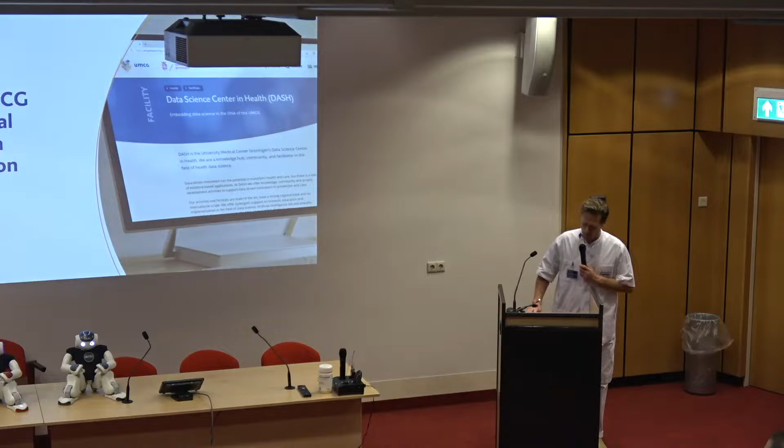What we aim to achieve, it's not so humble, but let's see if we can be a front runner in Holland, maybe even internationally, when it comes to data-driven healthcare. For example, in my case, patient-specific predictions based on machine learning. Why? Because we think that if you have patient-specific, individualized care, treatment improves. And if you want to state it, data-driven innovation contributes to our goal of building a future of health.

So potentially we are on the frontier here in Groningen, and our new decaan, Veronice, will certainly contribute in this direction, I'm sure.

So what can you get out of us, out of the Dash group? These are the pillars: clinical applications of AI, that's the field I'm interested in, to see if we can help patients with data-driven care. Machine learning, that's Peter van Ooijen, not here today, but that's very imaging-based clinical cohort data. Rosemarijn, she's from the radiology department, and e-health is Esther. These are, so to say, the clinical input into the Dash community of all smart computer scientists and the support team.

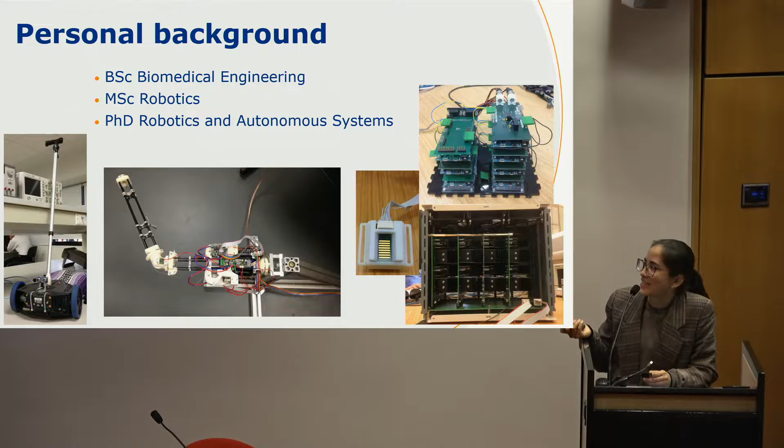So then please help me out for this. What do you guys think a robot is? Can I have somebody from bachelor's just giving a quick description of what a robot is?

What is a robot? All right, yeah. Okay. What about somebody from masters, or PhDs? What is a robot? Yeah, okay. Yeah, right. What about the medical staff? What is a robot? Okay. What about the people that are doing some business or marketing? What is a robot? Non-human actor. Okay, good definition. Not always, but yeah, okay.

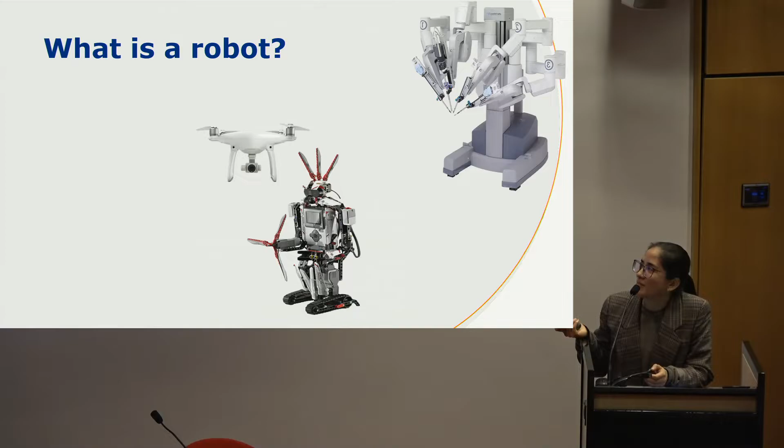Let's go through some examples and then you guys tell me if you think, well, first if you know what this is, and then if you think this is a robot or not. Do you know what this is? Yes. Is it a robot? How about that one? What is it? Yeah. Is it a robot? Semi. Okay, interesting. How about that one? Do you know that one? Does anybody know what it is?

It's a Lego Mindstorm. So you build it with Legos, and then it has here a console that you program. Is it a robot? Or is it a toy? Or is it a robot toy? What about that one? And it's a robot. Okay.

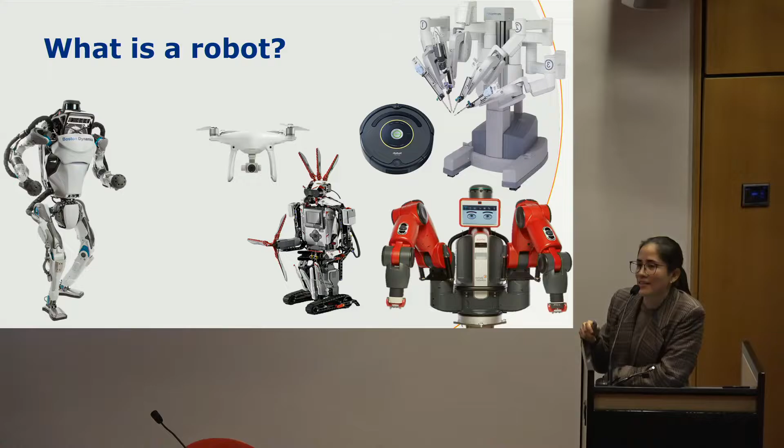How about that one? Have you seen this before? That one can do some parkour and some fancy dancing. What about that one? Have you seen it? Yes, what is it? The name is Baxter, and it is used in industry. But yes, it can do fancy things with the arms and with the facial expressions.

What about that one? Luke, what is it? What does it do? But it swims very nicely.

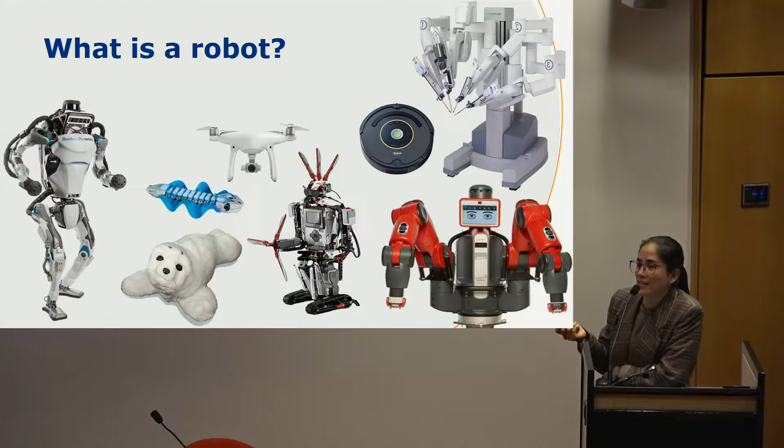And that one? Have you seen that one? What is it, Jenny? Yes. Oh, but you can feed it. You can feed it, and it blinks and it moves, and it's very cute. It doesn't have to, but it does it. So is it a robot? Let's just think about what a robot is.

Now I'm going to move on to what a robot can do in the UMCG specifically. And I think this question can be addressed at different levels. First of all, for the researchers, what can it do? I don't want to talk just yet about what we do in our specific group or department, but generally, for example, you could potentially use a robot for handling chemicals or tissues or performing certain tasks. Yes, maybe to save some money, but also in environments where a human might be at risk. So if you're handling dangerous substances, you might want a robot to do that with very high accuracy.

Also for the clinical staff, not mentioning the surgical robots, I would think that we could have robots transporting medicines or other medical equipment to specific areas within the hospital. For the patients, of course, you could have surgical robots. You can also have rehabilitation robots, like exoskeletons, to help out people that have had, for example, strokes.

For the patients as well, you can have soft robots or some other kind, like a capsule that moves throughout your digestive system with a camera, recording the whole thing. That's also really cool, in case you didn't know.

You also have what we call social robots, which you can use as companions or coaches, if you need the person to do something specific or be taught something. It can remind you when to take medication, when to stretch, or do physical activity, and can show you how to do it and do it with you. So it becomes a social companion.

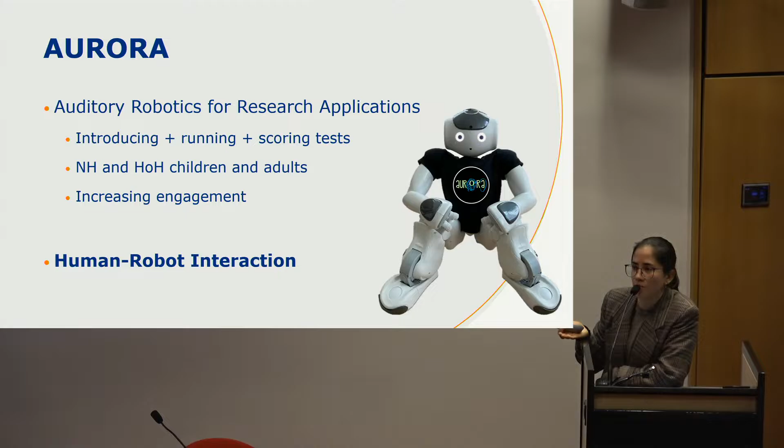So our hypothesis is if we bring the robot, it might be a nicer experience, more engaging, and potentially result in better performance. But what exactly is human-robot interaction? As the name says, it is the study of the interaction between a human and an embodied machine, which is a definition of a robot, by the way.

It is an interdisciplinary field covering many areas and potentially even more. As such, it comes with different challenges, from the social and physical design point of view, but also not only from robotics, but from technology in general. Think about how we interact with technology and robots, and to what extent you would categorize that as a social interaction, because the main aim of human-robot interaction is looking at the robot as a social entity or agent.

More specifically, what we do in Aurora is developing clinical applications based on human-robot interaction. We do everything from designing the interaction to implementing the robot, to evaluating the human-robot interaction.

And how we evaluate that, we use basically three approaches. First, we look at the task outcome, meaning the scores of the auditory tests, as in how well humans are performing when using the robot. Then we look at the robot's performance, meaning all the sensors and actuators - are the buttons, for example, working as we are programming them? Are the algorithms working as well?

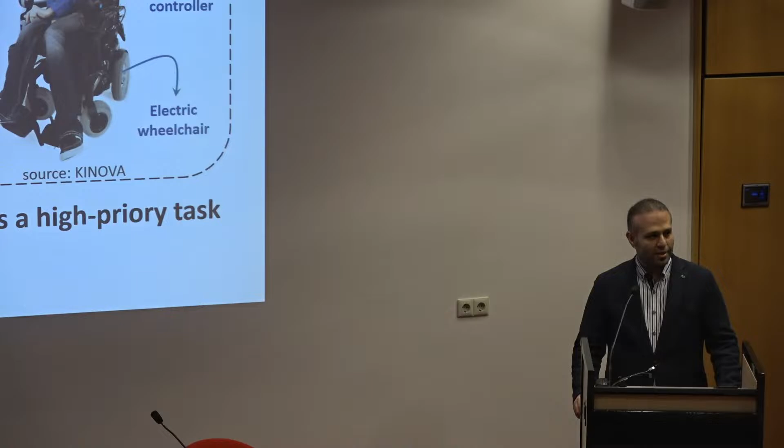Nearly 190 million people in the world live with some sort of motor impairment that can happen due to a genetic disorder such as SMA, ataxia, muscular dystrophy, or atrophy, or it can happen because of a life event such as a stroke, accident, or injury.

What we do for these people is provide them an electric wheelchair equipped with a robotic arm and also a joystick interface that the user can use to control the wheelchair as well as the robotic arm to do daily life tasks.

In particular for these people, object manipulation is a high priority task. And you may ask why object manipulation is important for them.

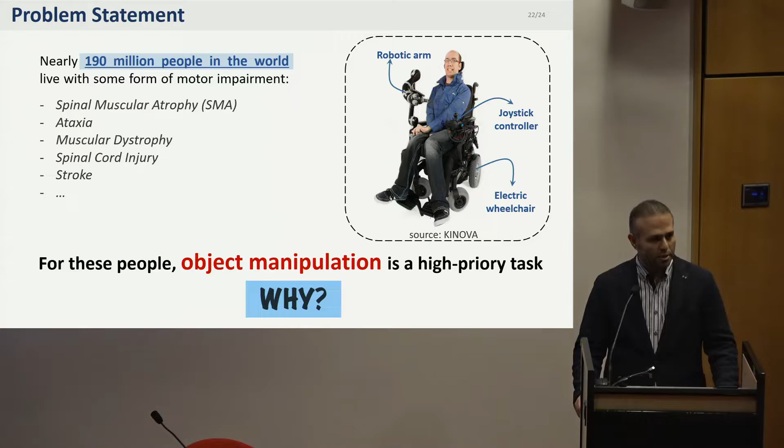The underlying reason is that if they can manipulate different objects in different situations, they can be more independent and do their daily life. They can go to a supermarket and do shopping, go to a coffee shop and order a hot chocolate and enjoy it, post their envelope, do their daily activities and social interaction, eating and drinking, and therefore they will be much happier than before, and they will be involved in the community.

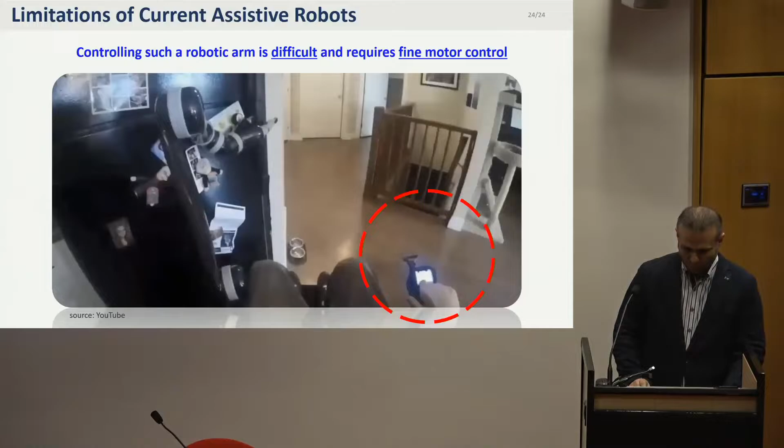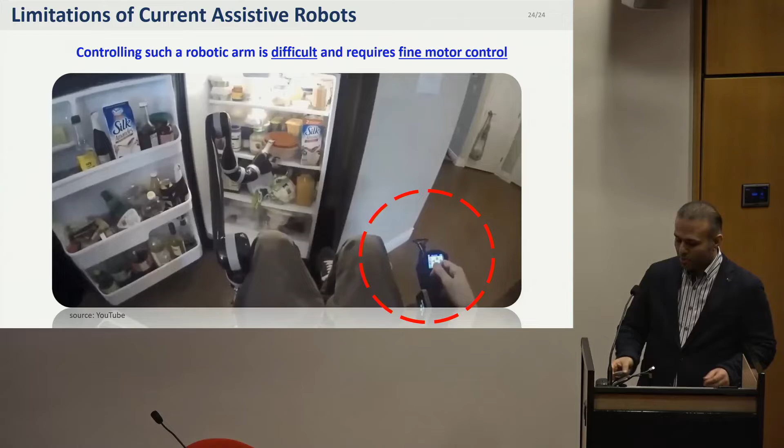However, the current technology is very limited. Pay attention to how difficult it is to control a robotic arm opening a fridge and picking up an item from a crowded fridge, as you see here.

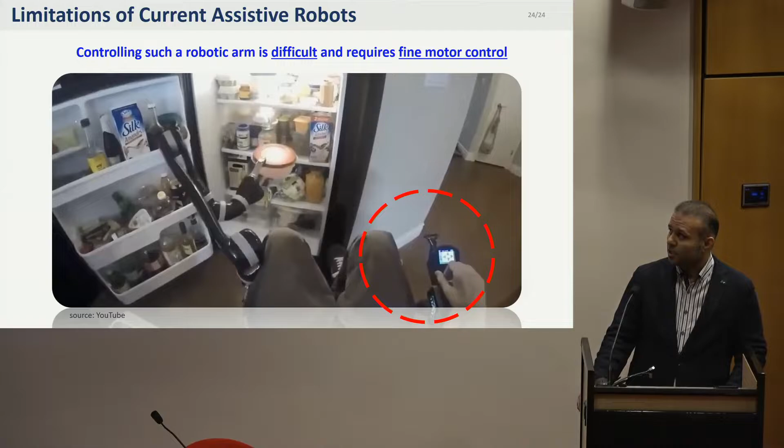The patient should several times change the mode of the wheelchair and also the robotic arm in order to be able to control it autonomously and correctly. This process is difficult and requires fine motor control, which is not necessarily valid for every type of patient.

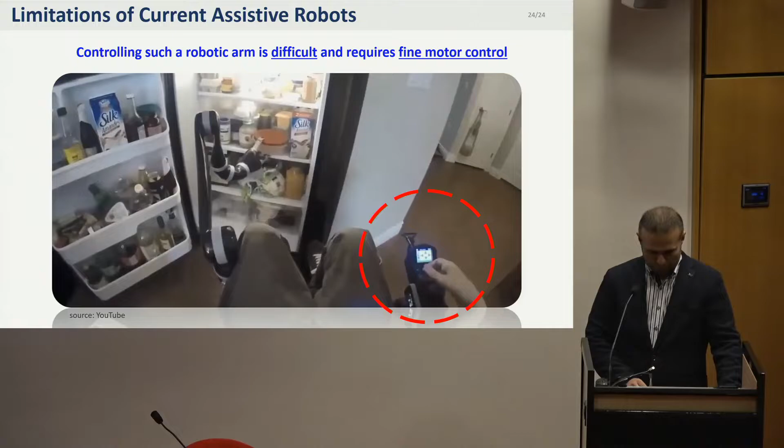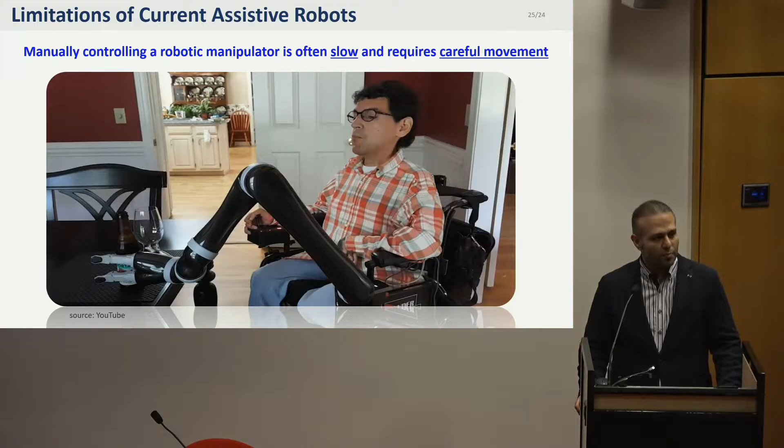From the other perspective, manually controlling such a robotic arm is slow and requires careful movement, which for some types of patients, especially those that experience brain surgery or a stroke, might not be possible.

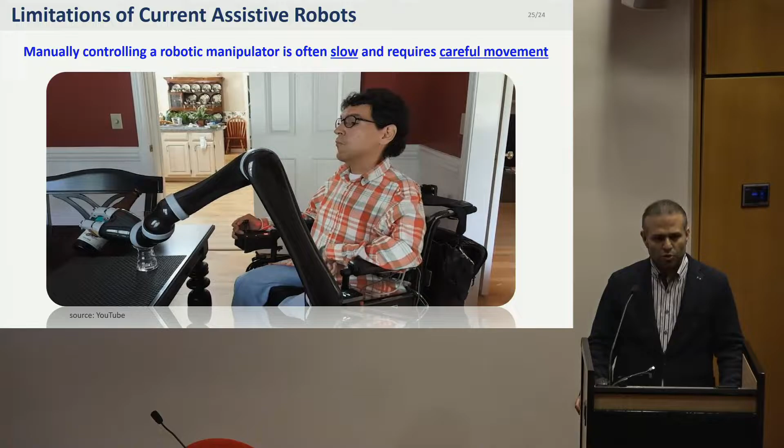This process is slow, and the user should carefully move the robotic arm in order to do the task. For example, here the task is to serve a beer, and the user very carefully moves the robotic arm in order to grasp the bottle, pick it up, and rotate it to pour the beer into the glass, and after that try to find a free place to put the bottle and then drink the beer.

The main question here is: can we develop a cognitive robotic system to overcome these limitations, to have a robot that can work more autonomously and faster?

In my research, I tried to address this problem through a lens of object perception and object manipulation.

For example, if you have a camera there, so the robot can perceive the environment, and the user can just say, 'Hey robot, this is a mug, can you grasp it?' And the robot can do that autonomously.

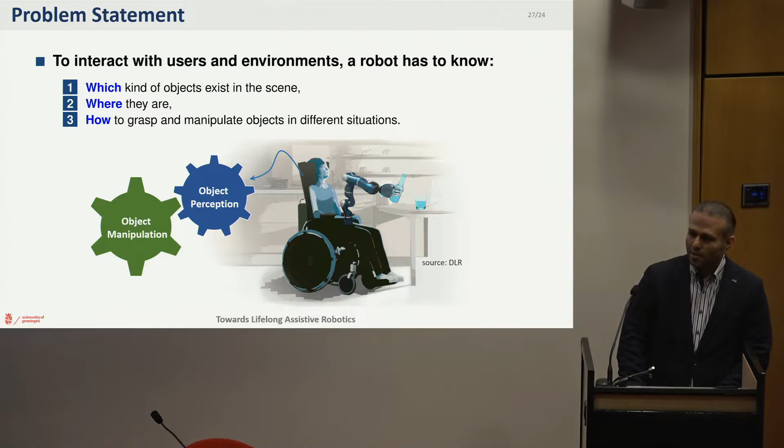In my opinion, the main reason is that in most robotic systems, the training and testing are two separate phases. Therefore, the performance of the robot strongly depends on the quality and quantity of the training data. Furthermore, the knowledge of the robot will be fixed after the training stage.

And if we want to change something or introduce a new object to the robot, someone, especially an expert, should come by, collect a lot of data, and retrain the robot again and again, which is time-consuming, expensive, and a complex procedure. Therefore, this type of approach limits the applicability of robotics in our society.

It should be noted that this type of training and testing works very well for factory-like environments where everything is predefined, such as a logistics center or car manufacturing, where you know in advance at which time which object will be at which position. It can also be used for disinfecting facilities where no one is running or moving around and everything is predefined, stable, or static.

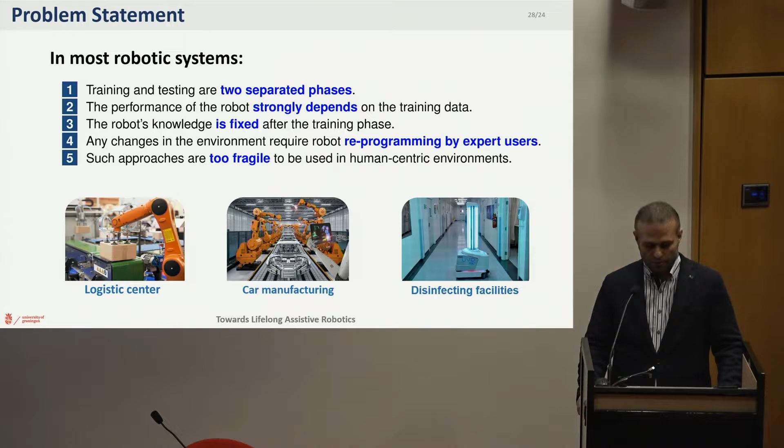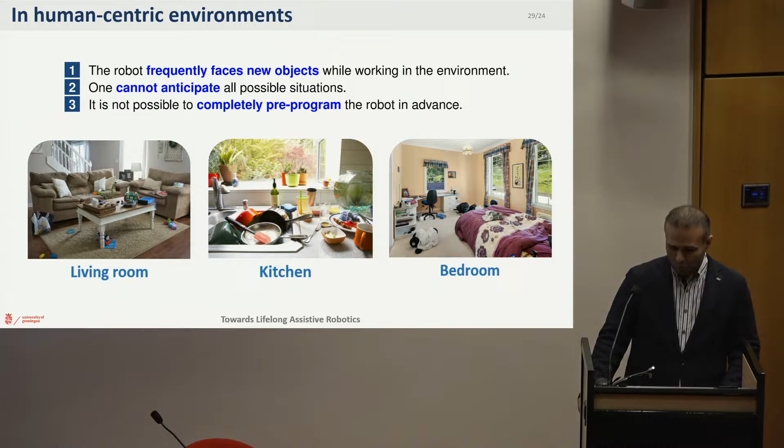In such a domain, it is not really feasible to assume that one can pre-program the robot in advance, because the robot usually faces a new object, new task, and new environment. And it also depends on the user preference.

So it is not possible to completely pre-program the robot. In my research, I tried to achieve a scientific breakthrough to enable the robot to learn new tasks in an open-ended fashion, mainly based on interaction, imagination, and imitation. Open-ended means that the training data come in an online manner, and they are not predefined.

For example, the user can point to an object and teach the robot that this is a mug and you can grasp it this way. This teaching can be through verbal language or kinesthetic means. Later the robot should perform the task in the same environment to show that it learned that task specifically, and it should also be able to generalize its knowledge to a new domain and new task. For example, if the robot learned how to serve juice, it should be able to serve beer, because they are semantically similar.

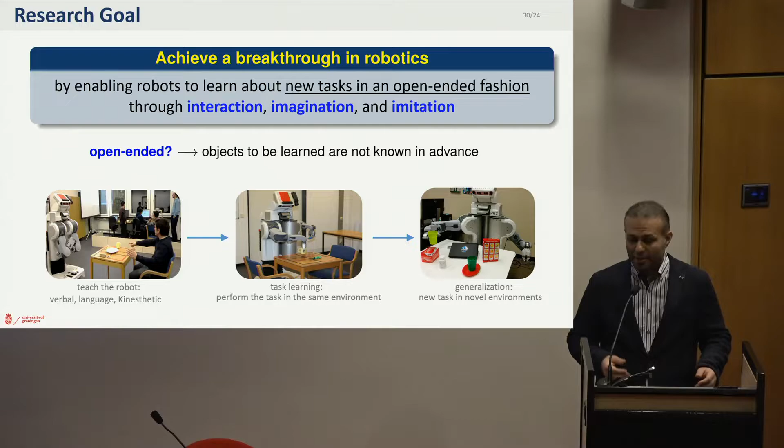Let me explain it better using a cartoon example. Assume that we have a service robot that is able to do a clear table task. For this task, the robot should remove all non-decorative objects from the table, which in this example are bottle, bowl, and plate, and also put the decorative object, which is a vase, into a predefined area.

In this task, the robot knows about the bottle and bowl, but it doesn't have any information about the plate. So it removed the bottle and bowl from the table and then asked the user, what is this object and how should I grasp and manipulate it?

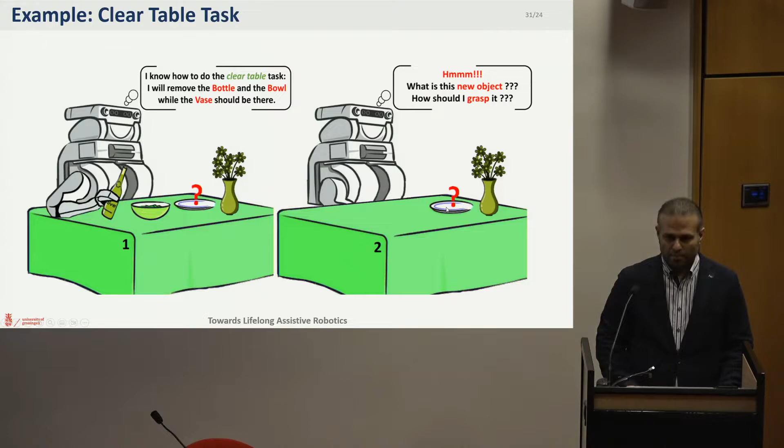A human user, who is a non-expert, comes by and tries to teach the robot: this is a plate, a non-decorative object, and you can grasp it this way. Do you want to try it? Since I'm here, I can confirm your behavior to address the safety problem.

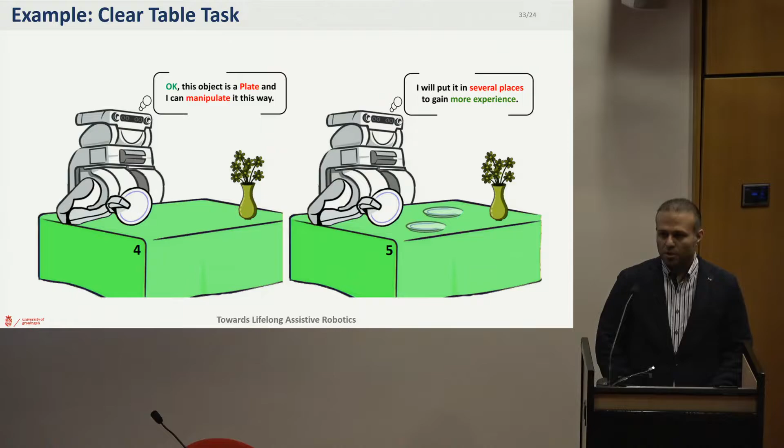Then the robot tried to grasp the object and put it into several positions in order to capture several viewpoints of the object, and also learn how to grasp it in different situations. After that it says, I learned this concept, and if I later face this object, I can confidently recognize it and manipulate it.

So this is the idea of open-ended learning. We do not need to program the robot again and again, and a non-expert human user can teach the robot new tasks, new objects, and whatever it wants.

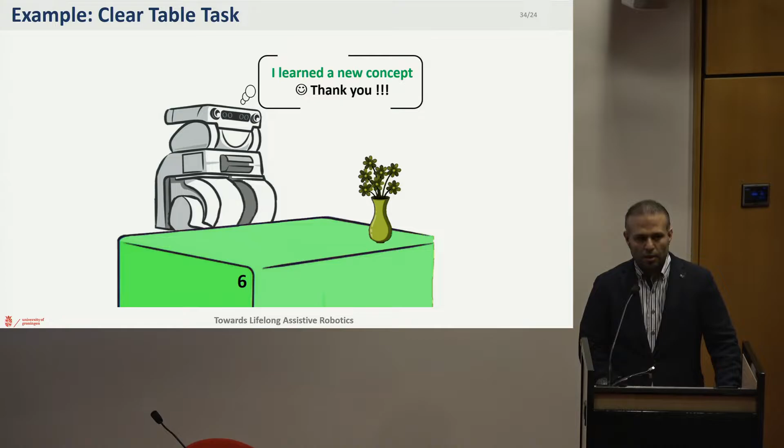Whenever we move to assistive robotics, in addition to open-ended learning, we need adaptability, trustworthiness, and capability. It means the robot should be able to adapt to new tasks, new objects, and new domains based on the preference of the user. And it should also be able to show some sort of explainability to capture the trust of the user. In particular, if the user doesn't trust the robot, they will never use it, regardless of how capable the robot is.

So upon request, the robot should be able to explain what it will perform to achieve a given task. The robot should also be capable of accomplishing a task in an appropriate manner and in real time, because we don't want a very slow robot that you ask to serve a drink and it takes like an hour to prepare it.

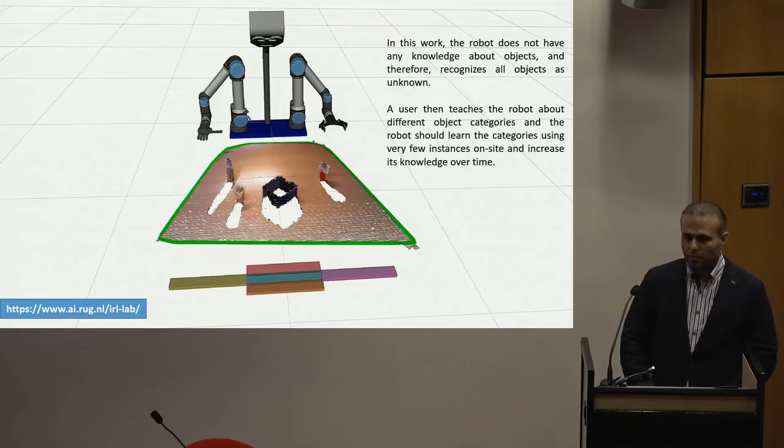In this scenario, the robot doesn't have any information about these objects, and this is what the robot can perceive through its camera. It first recognizes all objects as unknown, and then the user uses a graphical user interface to teach the robot that this is, for example, a cup, this is beer, this is a trash basket, and then instructs the robot to perform the serve drink task.

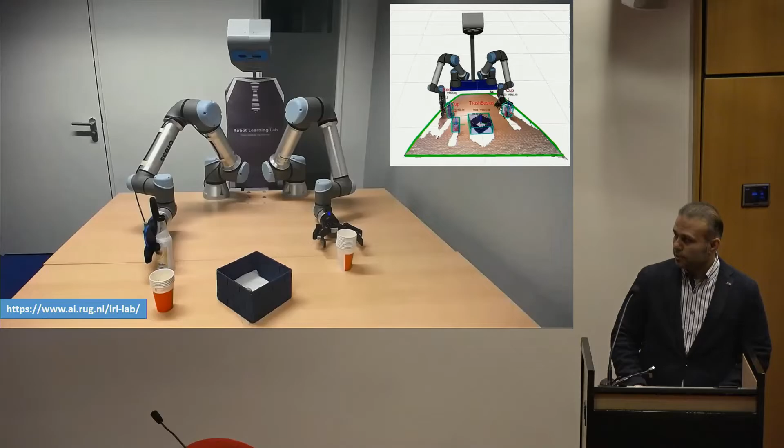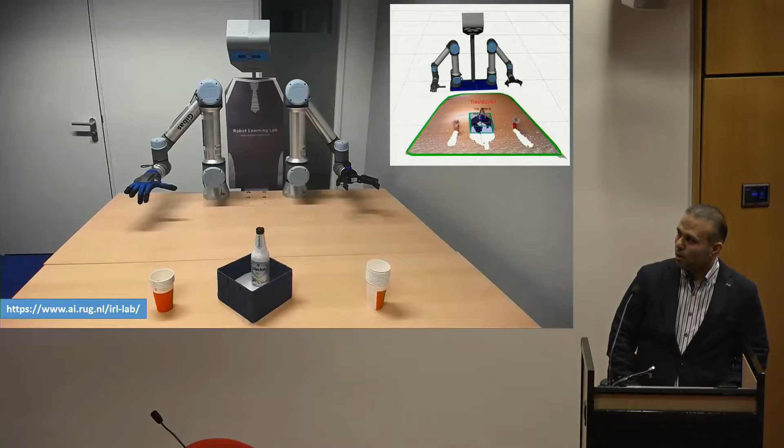Here you can see the perception of the robot, and here the action of the robot. If you compare this performance with the one I showed at the beginning, where the user manually controlled the robot, you can see how much faster this is through autonomous behavior or autonomous control.

In addition to grasping, manipulation, and learning about new objects, the robot should also show some sort of trustworthiness. Meaning that if the user asks the robot how it would do the 'serve juice' task, it should be able to explain it either verbally, through language, or based on a simulation.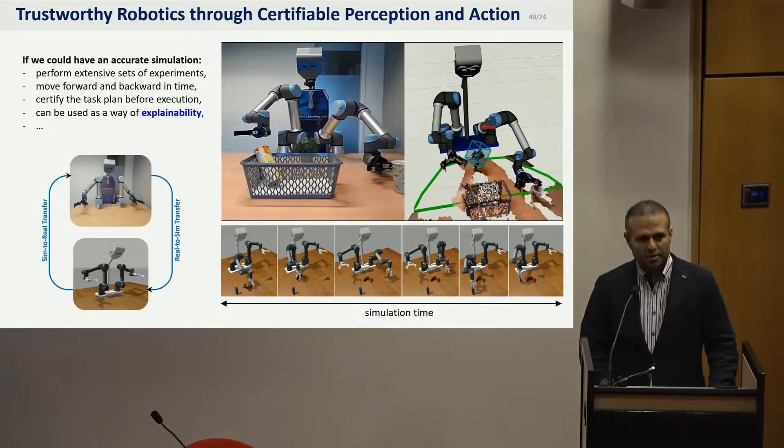We developed an accurate simulation environment for the robot so that before execution, it can show the process to the user. If the user agrees with the process, they can confirm the behavior, and the robot will start to execute it on the real robot. This simulation environment is also good for evaluating the robot extensively, and for teaching the robot in advance about different tasks whenever the user has time and is in the mood to work with the robot.

In a human-centric environment, the setting is not static, it is mainly dynamic, and the robot should be able to adapt its behavior accordingly. For example, here the task was to put the milk box into the red basket. The robot perceived the environment, and the user pushed an obstacle into its trajectory, and the robot was able to adapt. We also changed the position of the goal, and as you can see, the robot is able to adapt its behavior.

One future work I would really like to pursue is using such a robotic system for engaging children with developmental delays, such as autism, in more activities. In this scenario, we ask the robot to throw the object instead of picking and placing it, trying to throw it into the basket. If it can get a child to do the same, that would be great, and it will help them improve their motor control.

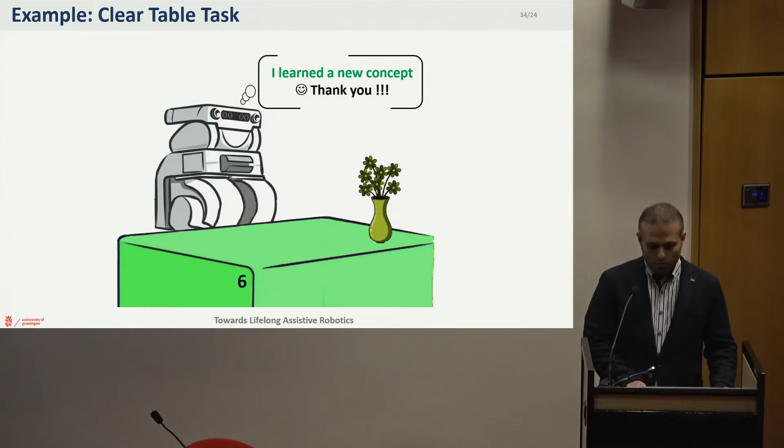But for those that are not able, we developed a graphical user interface. The user uses this graphical menu, the colorful one, to teach the robot that, for example, object number 1 is a mug, and the robot will conceptualize that. In the case of task execution, they can also say 'please give me a mug,' for example, and this kind of thing.

We also make it in a way that a non-expert human can add more and more functionality to it.

Have you found a way to get this to patients or to the market already?

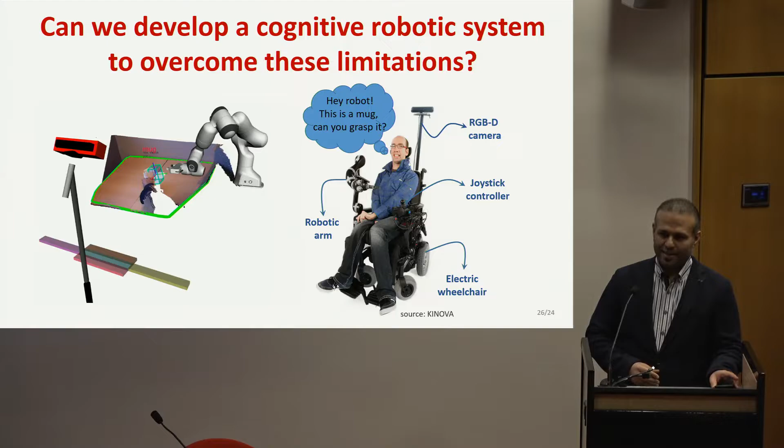I recently submitted a research proposal with one of the companies in Netherlands called Focal Meditech. They are the main experts on this type of devices, and we are really working together hard to make it possible.

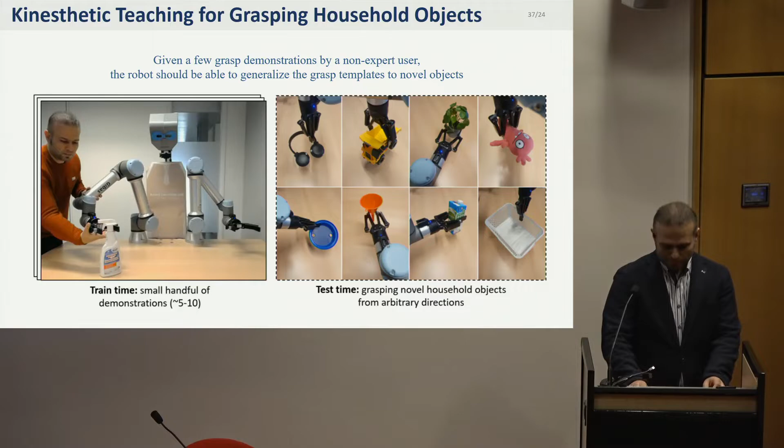Do you envision a robot in the ward helping nurses and staff without a specific assignment, and then seeing a bed that should be made and trash on the floor, and doing all that stuff automatically? Is that something you can start organizing from this tabletop perspective?

It depends. There is a good line of research on this topic that lets the robot do imagination similar to humans. Consider that whenever we ask a human to do something, they start thinking about it, imagining if I do this action, and later do that action, I can accomplish the task. So we will try to let the robot do a similar thing: think in simulation first, and whenever they have a concrete plan, they will start to execute it in a real world scenario.

Cool. Yeah, go ahead.

I was wondering about giving tasks. Would it be possible in the future to give tasks directly from someone's brain if he's not able to speak or move well enough to give tasks?

I think it should be possible. In the Department of Artificial Intelligence, one part is about cognitive modeling, and they are working on eye tracking and understanding brain signals using EEG and this kind of thing. By encoding those signals, it should be possible to provide a user interface that later the user can use to do whatever they want.

Thank you. There are robotic arms that are controlled via neurostimulation or how is it? Okay. Any other questions?

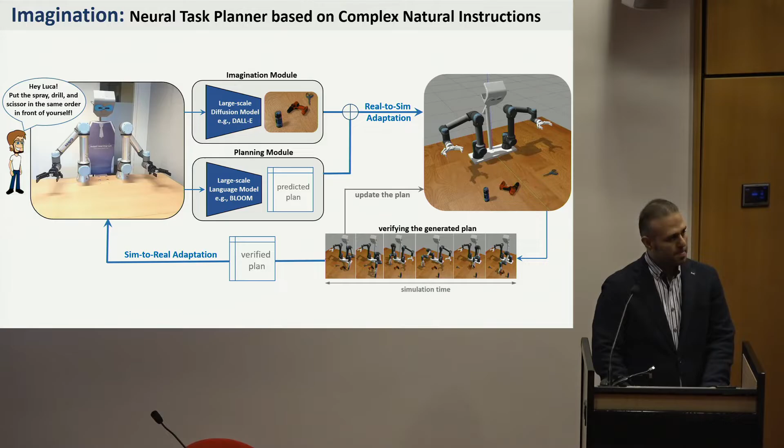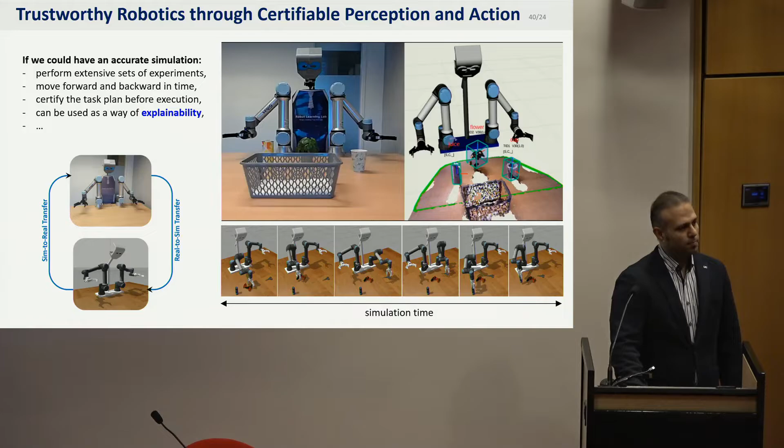So I had a question about the explainability you mentioned. The kind of explainability seems very minimal. As I understood it, you explain to the user what is going to happen. I thought it would be more informative if you could also explain the reasons something is going to happen, because that might make it easier to understand, and maybe easier to change if something doesn't work as expected. Is that something you're planning to add, or is it already there?

Explainability is a very active line of research, and of course it's very important for this type of application, because if the robot is not able to explain how it comes to that conclusion given an instruction, the user will not use it anymore after a while. Therefore, the robot should be able to explain what is going on not only through the digital twin simulation, but also through verbal or textual communication, explaining how it comes to that conclusion for a given task.

So this already does more than merely explain visually what it's going to do? It can also explain, for example, 'I do this because it's a decorative object, and you've told me that's supposed to go there' - these kind of things. The good thing with this kind of explainability is that if something in between is wrong, the user is able to correct it. So the robot can correct its plan just partially, not completely. It's like I mentioned, a very active line of research.

We have a question halfway on the right, perhaps. Yeah, go for it. It's soft, so you can't hurt anybody.

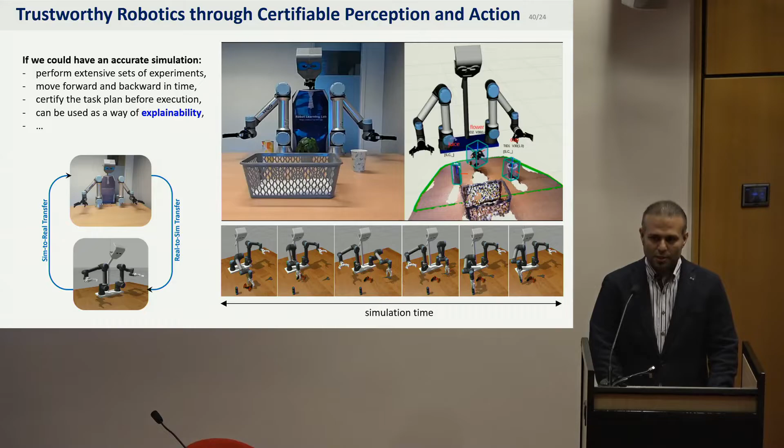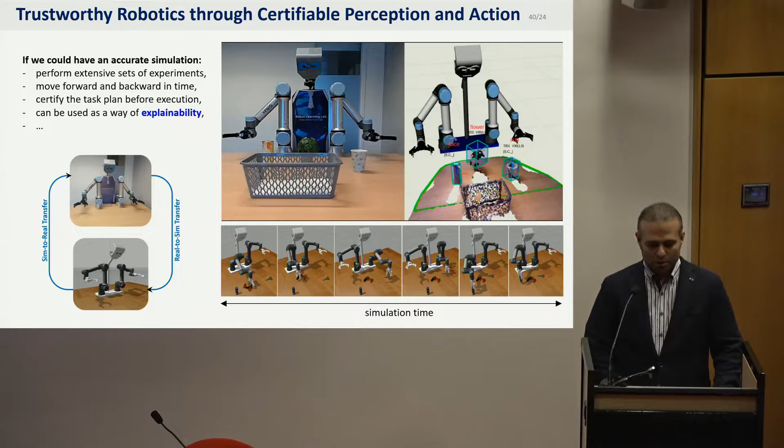Thank you. What happens when a failure happens? Can the robot also correct its own failure? Yes, it can try a second time, depends on the failure. If the failure happens in a way that the robot broke some part, it may not be possible to recover from that. But if the failure is in grasping, the robot can definitely recover from that. In this demonstration you can see several failures happen - the robot tried to grasp the object but couldn't, but later tried to grasp it from another part of the object.

But I noticed, for example, in this video clip, the last two objects were replaced in a new location to make it possible for the robot. You see that one? Yes, it was later put in a different location. So if you didn't do that, would the robot be able to try to grasp it?

The purpose of this work was object grasping in particular, but we have another work where we try to learn the synergy between grasping and pushing. So whenever an object is not graspable, the robot starts pushing the object and moves it into the area that is graspable. Thank you.

One last question and then we'll move on. Thanks for the presentation. Do you also produce some kind of confidence for any task they want to do? Because some tasks, like picking up the garbage, mistakes are affordable, but like feeding someone with a spoon, if the spoon goes to the eye or something, that's not affordable. Do you have a level of confidence for each task they want to do?

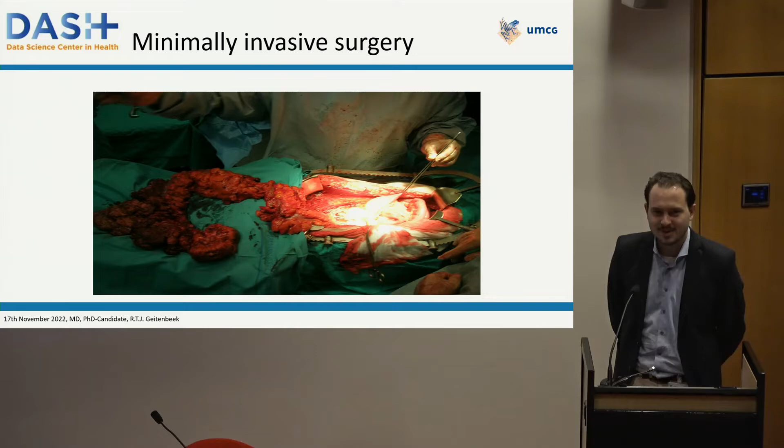Always start with a bit of a graphical image - it keeps the entire crowd awake and focused. But there's a key thought behind it. The idea is that a couple decades ago, we used to think the larger the incision, the greater the surgeon. Fortunately, we now realize this is often very disadvantageous for the patient. So we work towards more minimally invasive surgical techniques.

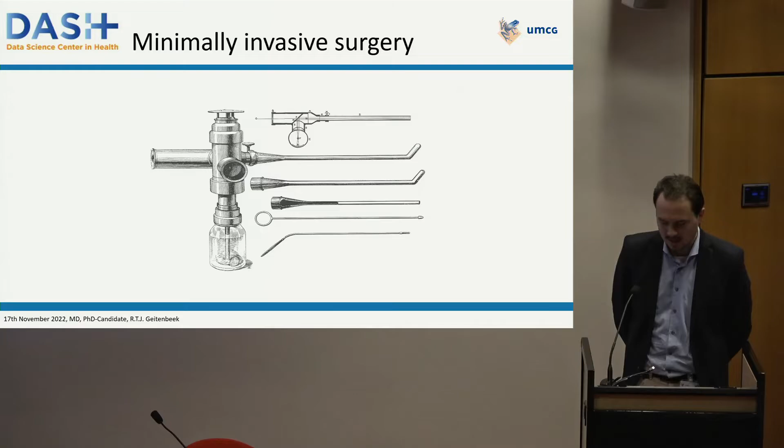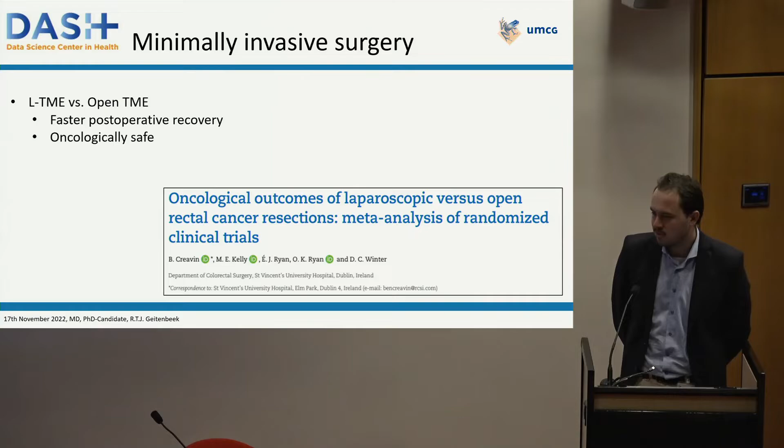In 1805, the Lichtleiter was first described, and since then we've worked on developing laparoscopic surgery as the first minimally invasive technique, particularly for rectal cancer treatment, which is my field of expertise. We've seen that with laparoscopic surgery there's faster recovery times, while still having good oncological safety comparable to open surgery. Nowadays, mostly laparoscopic surgery is used for these patients.

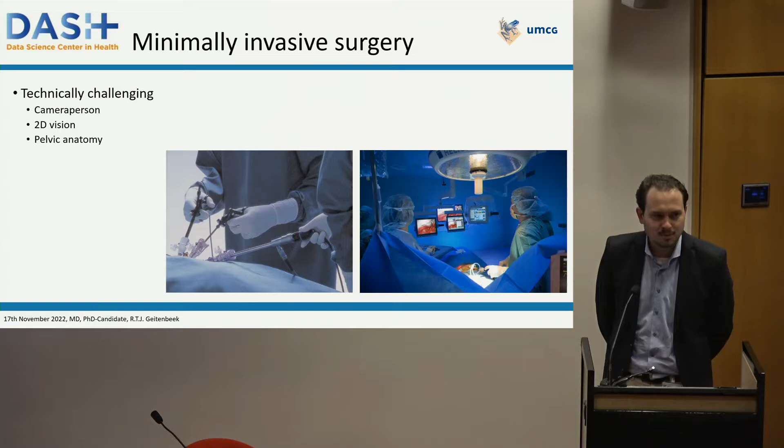However, laparoscopic surgery by itself still has some issues. It's technically very challenging because with laparoscopic surgery we have 2D vision, and we're dependent on a person to move the camera for the surgeon. Also, particularly in rectal cancer, there's the pelvic area, which is a very narrow and confined space of the abdomen, making maneuverability difficult.

So the robot was developed. It may be a bit less fancy than we've already seen from our colleagues - it's the Da Vinci robot, which is now currently used a lot. It was first developed by the army, with the idea that they wanted to be able to treat soldiers with life-threatening injuries in the field without having a surgeon present at that place.

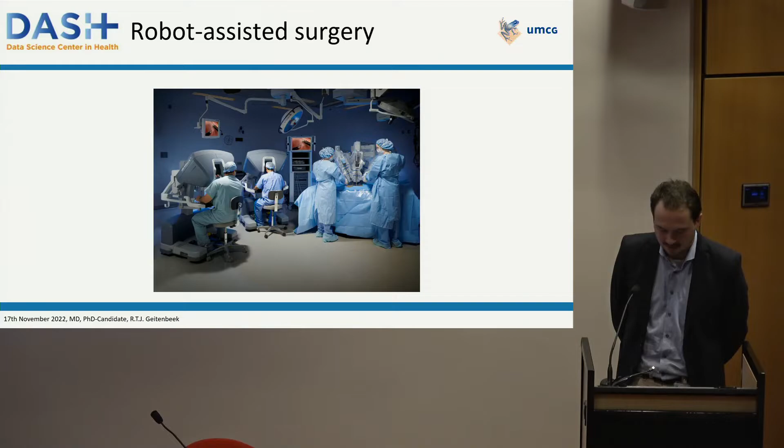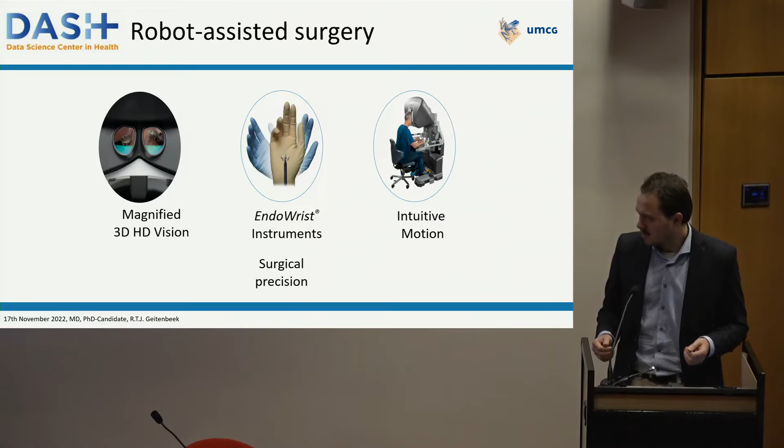When we started with the robot, it had two very rigid instruments, similar to laparoscopic surgery. It was like trying to grasp a matchbox with two walking canes - very difficult, with very rigid instruments that were hard to control. Well, nowadays we've made significant progress, and we're able to perform more delicate surgery with the robot than we are able to do with our own hands or with laparoscopic surgery.

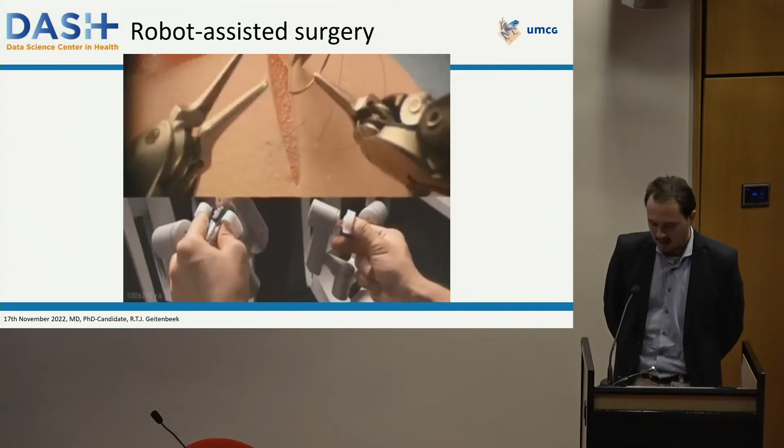And also, for the robot we have 3D vision. This is the way the surgeon actually controls the robot. Like I said, there are many advantages of the robot.

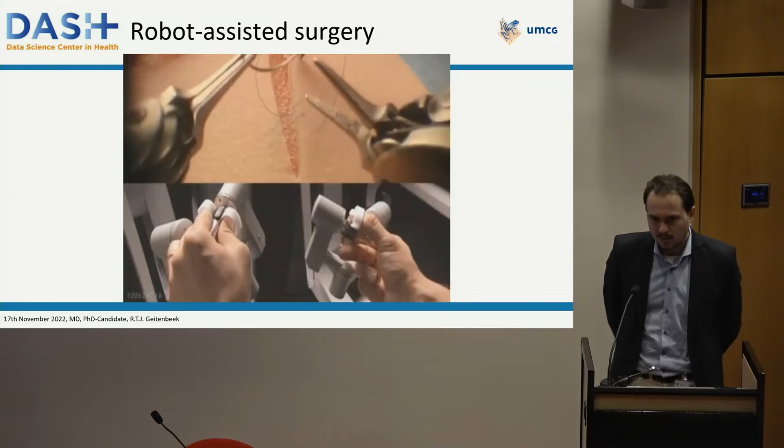For instance, in laparoscopic surgery there's the fulcrum effect, the effect of natural inversion. That means that when we stick a rigid instrument into the patient, the point where it enters the patient forms a sort of turning point, which means if I move my hand to the right, the instrument in the patient goes to the left - whereas in the robot, left is left, right is right, so it adjusts for the fulcrum effect. The robot also actually filters one's tremor that we all have in our hands, whereas with laparoscopic surgery it's enhanced because there's a long stick you're moving around, and at the end you'll see more of the tremor.

Ergonomically, we found that over 80% of surgeons who perform laparoscopic surgery for longer amounts of time develop back issues, whereas for robotic surgery, it's a relatively comfortable position to stay in for numerous hours.

Then we also have the dual console. As you can see, there are often two consoles which allow surgeons to both look in 3D at the same view and to correct one another if needed, which is ideal for training young surgeons.

Also, we think that the robot for colorectal cancer may be more future-proof compared to other platforms because it allows us to introduce telerobotics, targeted tracers, and fluorescence.

As a new technique, we had to look at whether the robot was safe and what the costs of the robot were. To explain that, I want to discuss with you some of the research we've done for rectal cancer treatment.

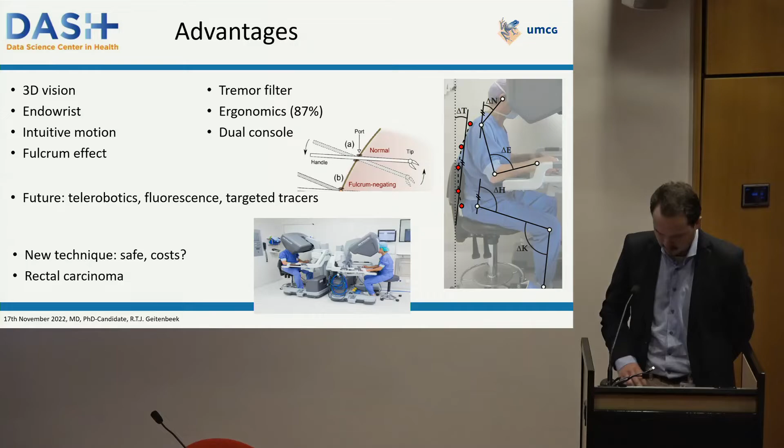As the crowd is of different backgrounds, here's some short background information on rectal cancer surgery.

The surgical technique we use is called a total mesorectal excision, which means we remove the tumor as well as surrounding tissue, because it reduces the chances of remaining tumor cells which would lead to local recurrence of the tumor. It was developed by Professor Heald.

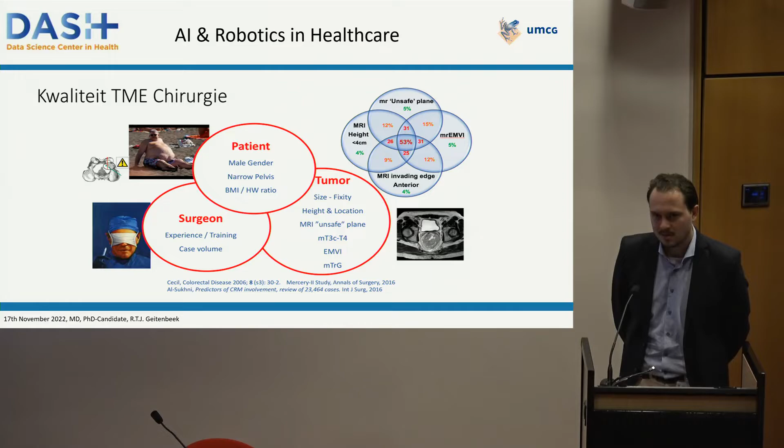The most important part is that we always aim for a complete resection. You want to remove the tumor as a whole to give your patient the best outcomes. That's all dependent on patient and tumor factors, but also on the surgeon's experience with the technique. Robotic surgery was introduced around 2010, so there are still many surgeons learning this technique.

When looking at the safety, the ROLARR trial was one of the largest trials that compared robotic rectal cancer surgery to laparoscopic surgery, and it found similar outcomes in terms of oncological safety.

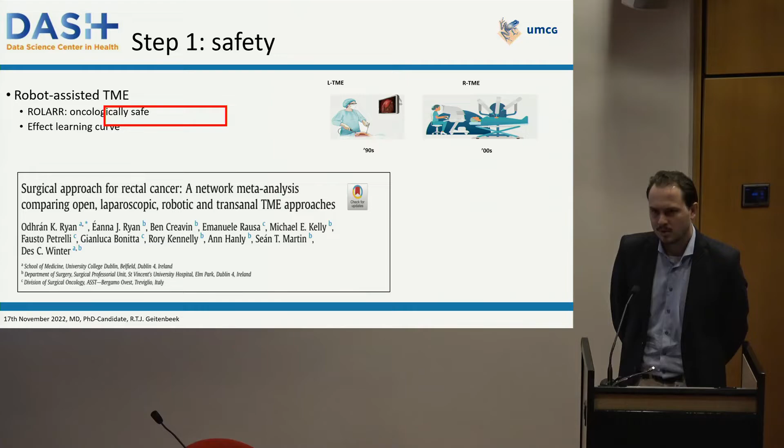However, we found that we were comparing laparoscopic surgeons who had been using these techniques for 10 to 15 years to robotic surgeons who were just performing their first surgeries with this. So we adjusted for the outcomes of this trial, and we found that it indeed had an effect on the postoperative outcomes.

We also performed a systematic review, and from the limited literature available, we saw that for robotic surgery, you need to perform between 30 and 70 procedures before you reach your plateau, before you're confident and have maximized your efficiency with the robotic surgery.

Looking at these learning curves, we found that during the introduction period of robotic surgery, there were similar intraoperative and postoperative complications, though for the first 30 procedures, the operative length was much longer for the robot, which makes it a more expensive technique.

When looking at the long-term local recurrence rates, we found something very interesting for us. We found that even in the first 1 to 10 cases, there was already a local recurrence rate between 4 and 5%, which is relatively low and which we are not able to replicate with other techniques during the learning phase.

These percentages for the first 10 cases performed with another technique may be around 10 to 13%, which is significant. So this told us that the robot was safe even while surgeons were studying and learning how to use it.

Then we did a small retrospective cohort study across 8 centers, involving surgeons who were beyond their respective learning curves. We found that if you compare laparoscopic to robotic surgery for surgeons who had done more than 50, 60, or 70 procedures with the robot, they were able to provide equal postoperative outcomes as well as oncological safety. But particularly in colorectal cancer, we found that with the robot we achieved a 20% lower stoma rate at 3 years following surgery.

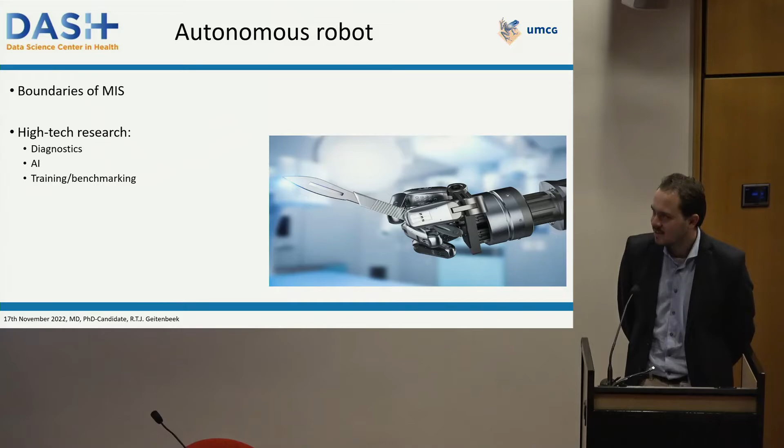We are not yet at the point where we can let patients safely interact with our robot. We still get the question often: so you'll be performing robotic surgery - does that mean you just flip a switch and go drink a cup of coffee, and then when the surgery is done, the surgeon returns? We're not there yet. We're still teaching the robot - we can teach it how to do a lot of things, but as soon as one variable changes, often the whole plan changes. So we still need to teach the robot how to do things better.

As of now, we're still using the robot as a tool to find and explore the boundaries of minimally invasive surgery, and we've already been able to extend our success rates of surgery as we had with laparoscopic surgery.

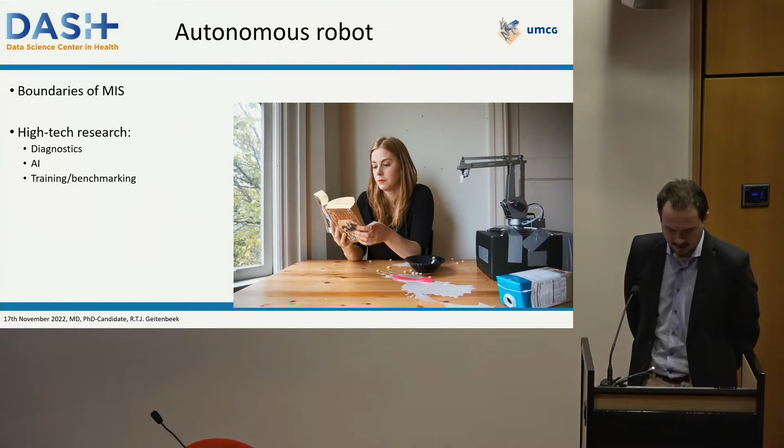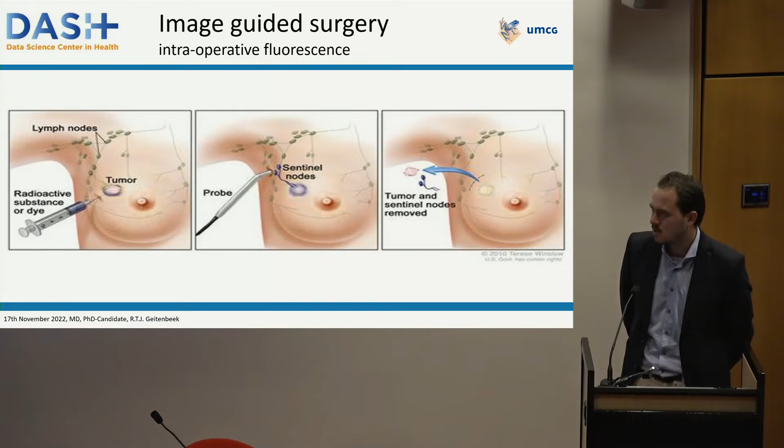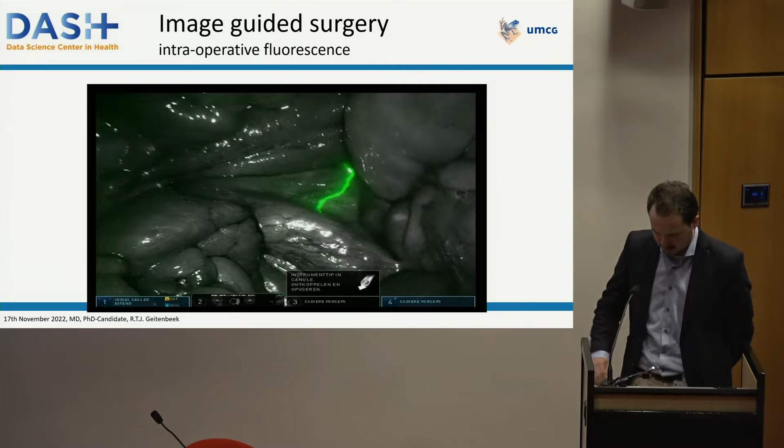We're performing a lot of research, first of all towards diagnostics. In breast cancer, we often perform a sentinel node procedure - we look at the lymph nodes the tumor is most likely to spread towards. If these lymph nodes are affected with tumor cells, we remove a larger piece of tissue rather than just the tumor. If the lymph nodes are not affected, then often just removing the tumor is enough. We tried doing that in colorectal cancer for a number of years, but it was always difficult because of the fatty tissue in our gut, which makes it very hard to identify lymph nodes.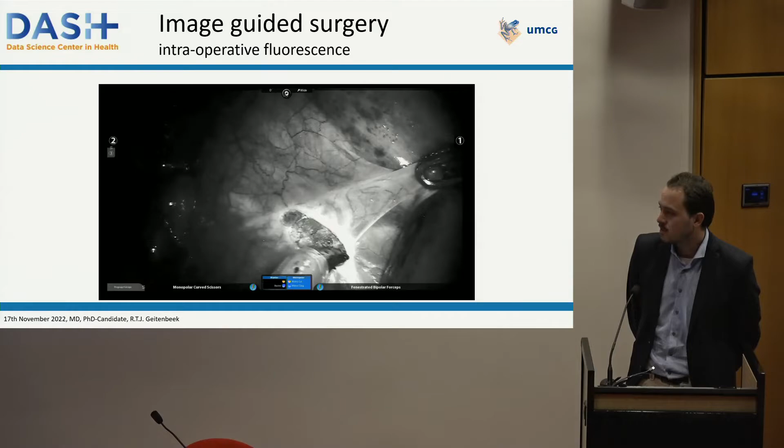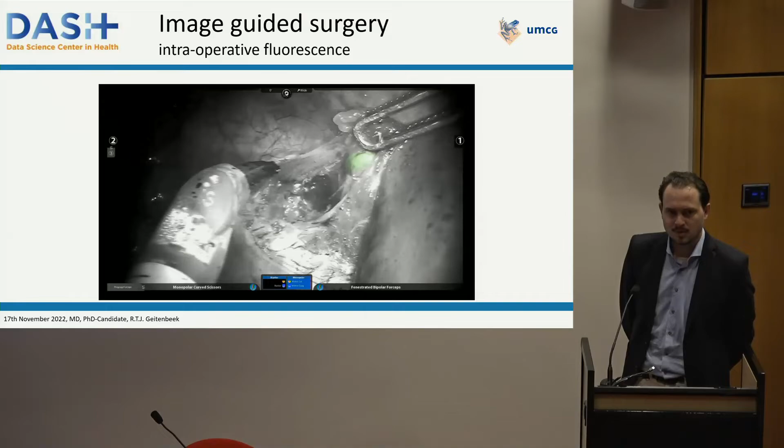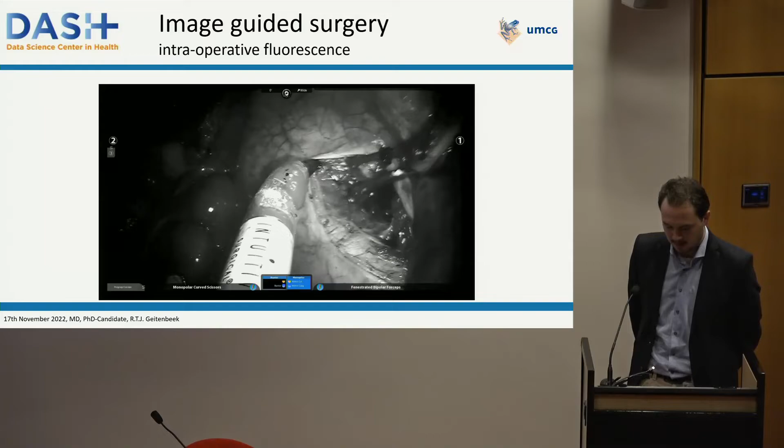With the improved camera of the robotic system and new immunofluorescent markers, we think we might now be able to recognize these sentinel nodes for colon cancer. Here in our center with the robot, we've identified with immunofluorescence one of the lymph nodes. We remove them and have the pathologist check them. If we're able to do this well enough, then for colon cancer we might at some point no longer have to remove 25 to 40 centimeters of bowel even for lower stage colon cancers. If the lymph nodes are safe, then perhaps we can be satisfied with just removing the tumor, meaning no anastomosis and no stoma for patients. We're now performing this trial on the first 40 in-human patients in our center.

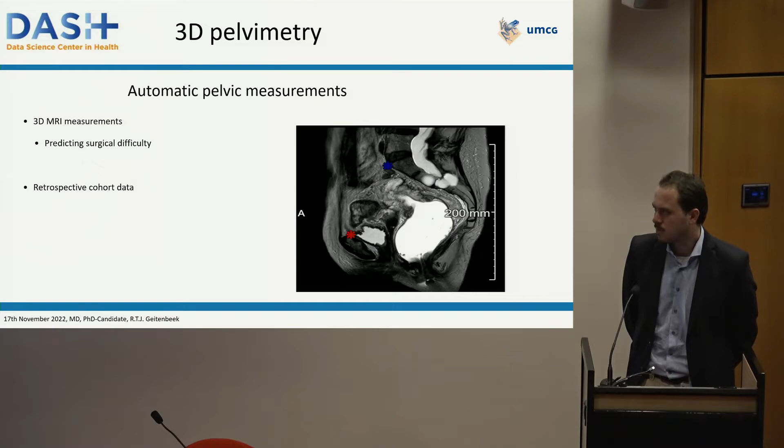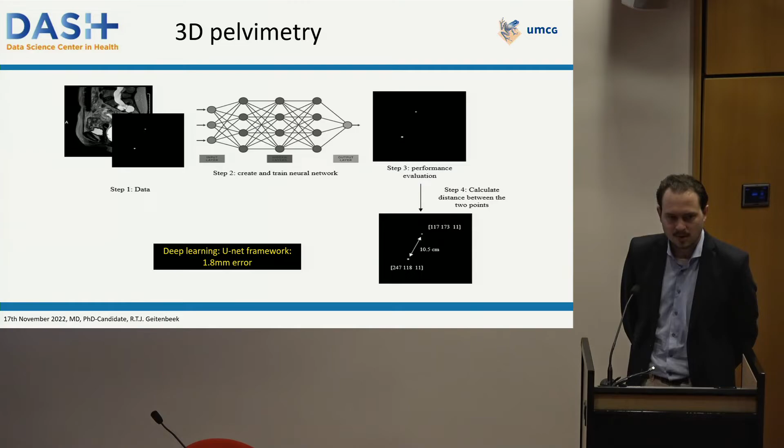3D pelvimetry is another project we're working on. We know that the measurements within the pelvis can be predictive for surgical difficulty, which can be a predictor for intraoperative complications, blood loss, and length of surgery. However, it takes a lot of time for the radiologist to identify these points, so they don't do it regularly in clinical practice. So we've been training the robot with 100 scans which we've annotated with these points, and we're validating how well the robot can recognize these points using a deep learning UNet framework. Up to a 2 millimeter error, the robot was able to identify these points for us, which could be a first step towards 3D pelvimetry automated for all patients in the Netherlands.

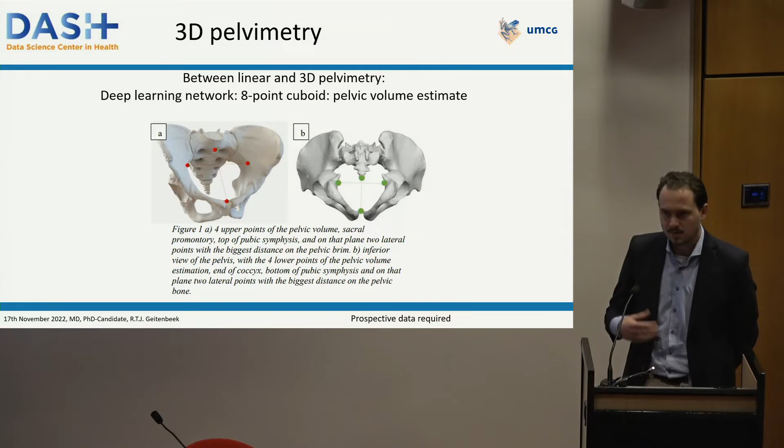We're now working on assessing over 1,500 scans in which we want to develop an 8-point system, and we want to see how well the robot is able to detect these points also. These are all bony landmarks because we're not that good at having the robot identify soft tissue yet.

Then there's the AMIRA project - augmented minimally invasive robot-assisted total mesorectal excision. It's a mouthful.

I practice that a lot.

This is one of our main projects in the Netherlands and Europe. Over 10,000 laparoscopic robot-assisted surgeries are performed annually, some for colorectal cancer. We've discussed advantages of the robot, but we still have a limited field of view, limited maneuverability, and the robot is unable to provide the surgeon with haptic feedback.

So we want to develop a decision support platform for the surgeon, helping during surgery through augmented visualization. We want to use preoperative MRI scans and transplant that image onto the live surgical feed so we can better recognize the tumor, blood vessels, and nerves. We also want to develop shape-sensing endoscopes to give more information about the anatomy in the pelvis, and force sensing to enable haptic feedback and adjust for interaction forces.

When the MRI is made, the patient is lying perfectly flat, but during surgery we often have to tilt them, sometimes upside down, so the organs tend to shift. The augmented visualization also moves out of place, and that's what we want to adjust for using interaction force analysis. We do all this with a digital twin, made using AI and classical modeling, to develop a virtual copy of the patient.

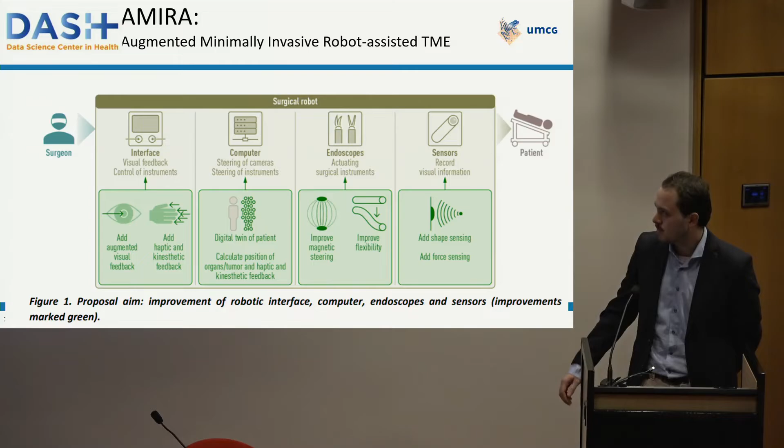This is just schematics.

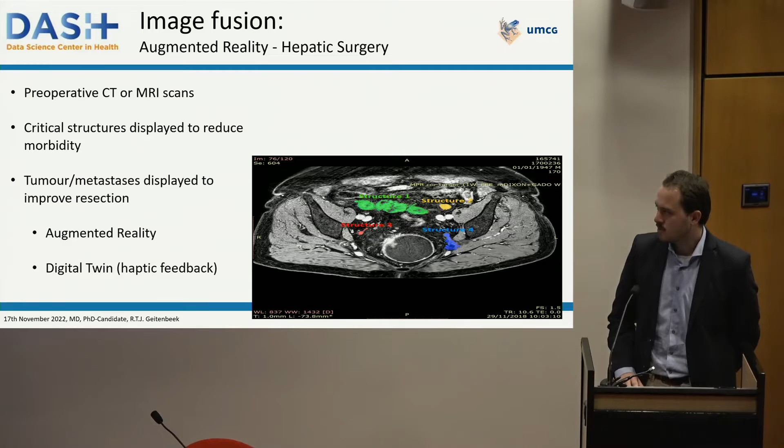For all these MRI scans, we identify the most important structures—currently we still have to draw them in by hand. Then we work towards augmented visualization; in this case it was performed on a liver. We want to provide the surgeon with extra information during surgery to help recognize vital structures you don't want to accidentally nick into, and also to identify the tumor.

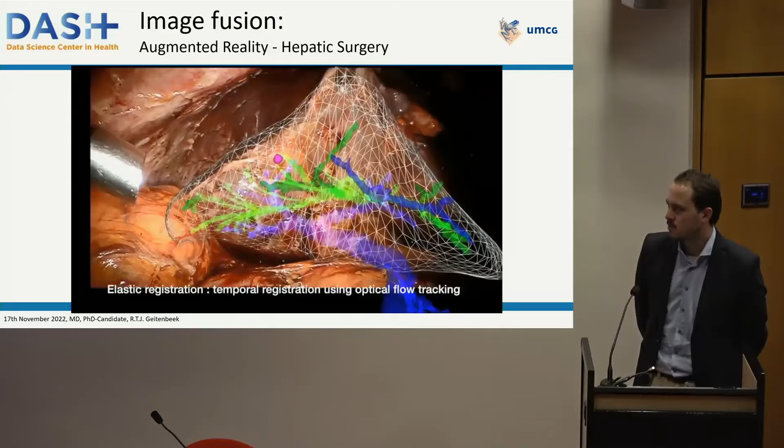What's most difficult is we're working with a dynamic system constantly moving due to the patient's breathing and our manipulation with instruments. This is what we're working on for colorectal cancer also.

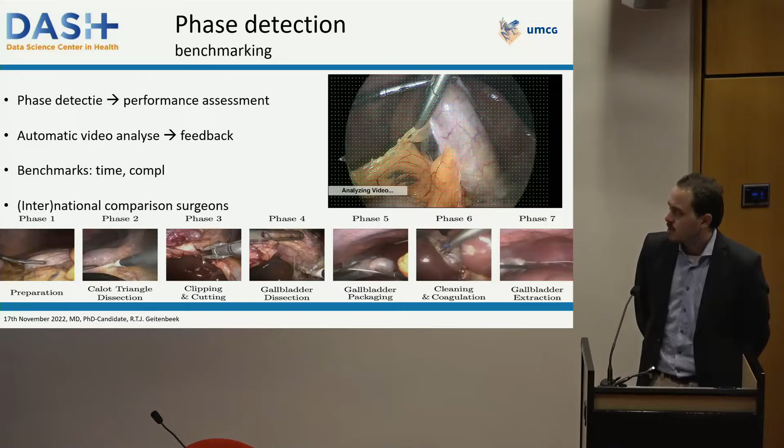Lastly, we're also working on phase detection, in gallbladder resections. We assessed hundreds of operation videos and determined which phases of the surgery we're at—this is the cutting of a vessel, this is the removal of the gallbladder.

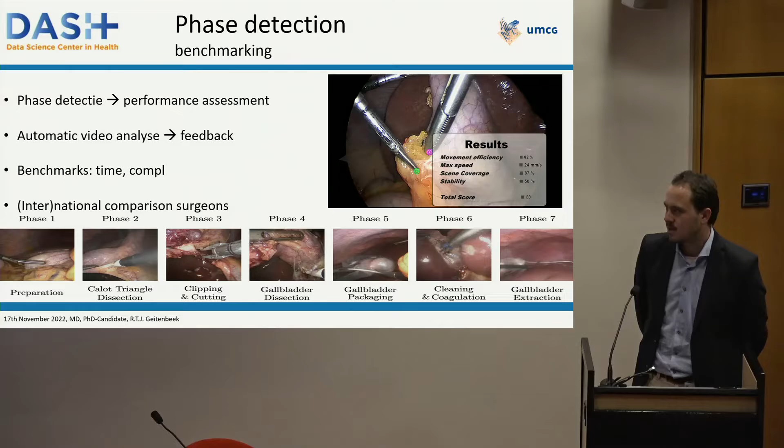We teach this to the robot using deep learning. We want the robot to tell us what phase of the surgery we're in, how efficiently we're moving, whether we're faster or slower compared to other surgeons. We want to make benchmarking possible, as well as international comparison.

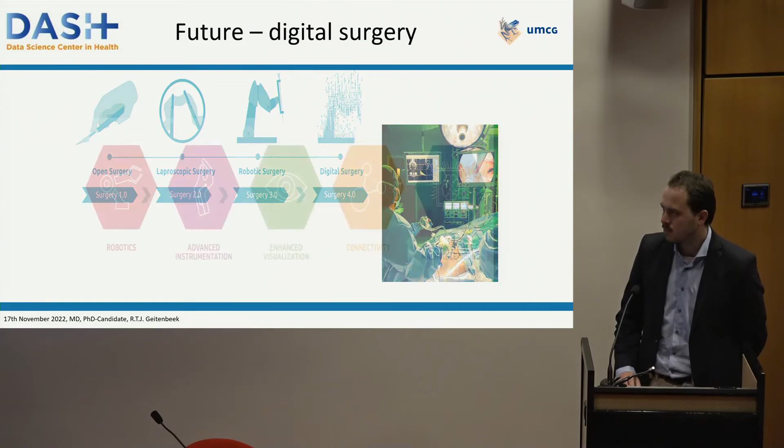Robotic surgery, I think, is just the next step towards digital surgery. We're always looking to improve and further enhance patient outcomes, doing so with robotics, machine learning, improving instruments, and 3D visualization.

I think that's the most important part of our presentation. We're still working, doing the best we can to keep improving. I've taught you about minimally invasive surgery, the introduction of robotic surgery, shown you results identifying safety and cost, taught you that we might have fewer patients receive a permanent stoma when performing robot-assisted surgery, and that we're still working towards digital surgery. Thank you.

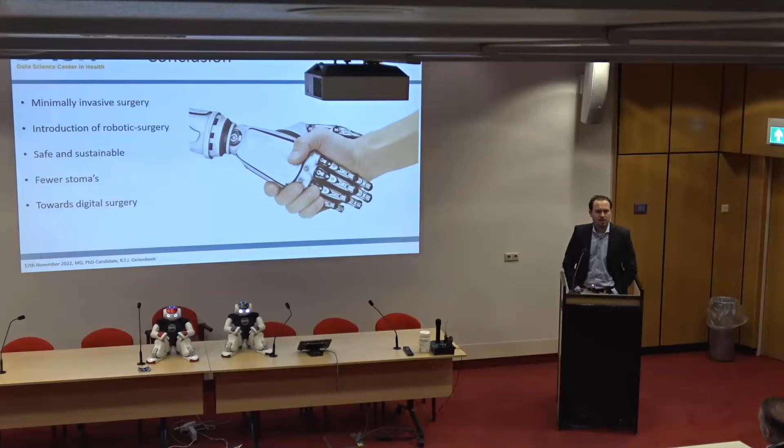Yes, we're already doing so. For instance, the Da Vinci robot already has several simulations which start relatively simple—you have to pick up something and displace it elsewhere, and it can also teach you how to do simple sutures, etc. That's all in a simulated model. There's no patient involved, but there are some models with an anatomical black box in which the instruments are hidden, and you can perform the surgery in there.

And then it tells you how efficient you are, somewhat similar to what we're doing for phase detection. So we're already training on the simulation models, and if we're able to develop all these new features, we want to introduce them into the simulation models too. We're already in close contact with Da Vinci, because the industry is helping us a lot in these projects, since they know how their product works, what's feasible and what's not. So we're working with various partners.

Accompanying that question, is that training also being recorded? You could probably use it as training input to create an automated surgery robot as well, especially when looking for the points relevant within such a surgery. So, I don't know.

Yeah, so we're still quite far away from doing that autonomously with the robot. We're slowly trying to give some more tasks to the robot, but it's very difficult because the robot isn't used to changing circumstances. A surgeon can identify a bleed and know it needs to be stopped right now, or recognize a different anatomy if a patient has received neoadjuvant chemoradiation therapy or had a previous cesarean section, which changes the pelvis anatomy—the robot doesn't recognize that at all. So it might be feasible on a very generic standard patient.